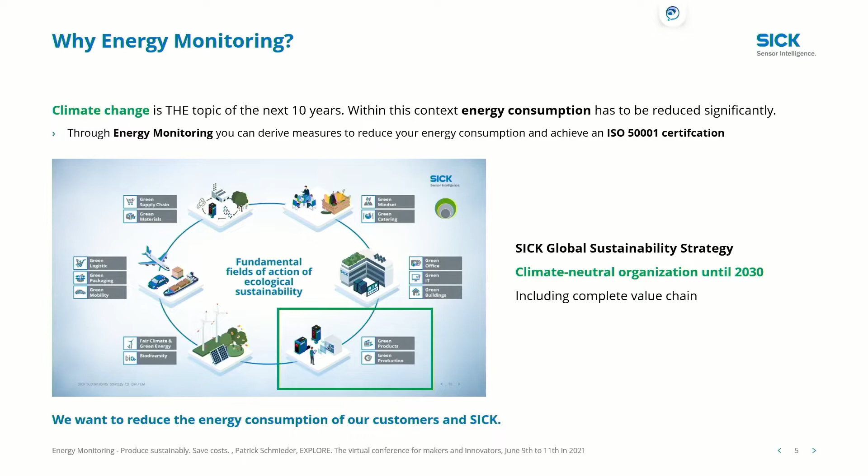So what are the benefits, let's say also in a short-term way, for energy monitoring? So often we see a very fast return on investment through these derived measures. And maybe you all know, at least our listeners from the European Union, that there are certain CO2 compensation fees, and these are significantly increasing fees from now on until 2030. For example, this year it is 25 euros, and I think in 2030 it's around 60 euros. So this is getting a more and more significant cost factor. So the cost, 60 euros, for example, is then per ton CO2.

So benefits of energy monitoring really depend on local conditions. So it depends what your government is doing to support this important topic. So I would like to ask you the question, how is it in your country? And there you can see how big the benefits are in your country. So if we look, for example, at Germany, the benefits often depend on the international standard ISO 50001, and therefore you need to have a continuous improvement, within this PDCA cycle as an example, in your energy consumption. So you really have to continuously reduce your energy consumption.

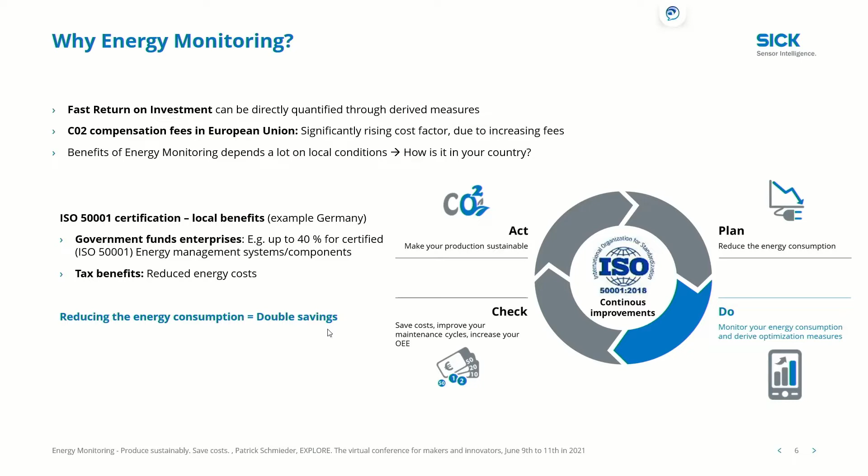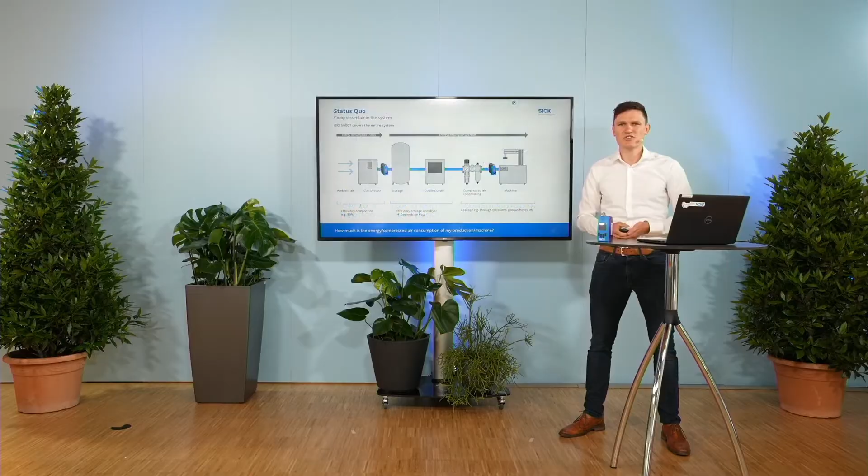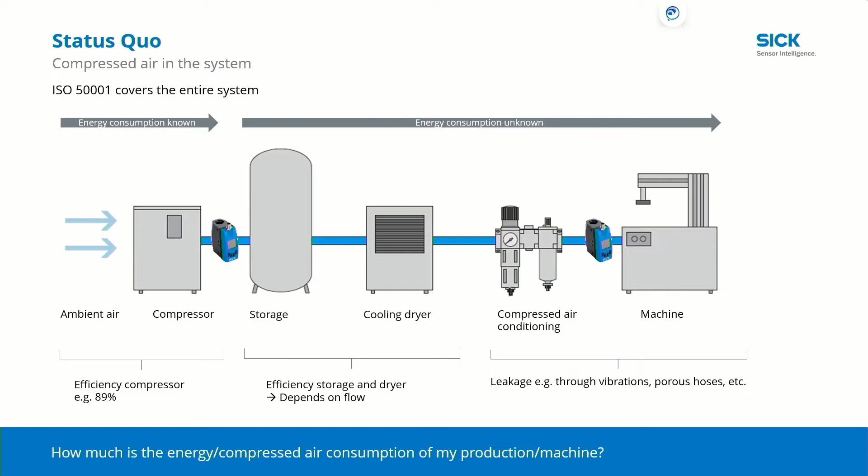There we are. Sorry for this short break, but now we come to the question of how to monitor the energy consumption on shop floor areas. And especially I want to go more in detail into the example of compressed air. So first of all, we have the current situation that we often know how much electrical energy our compressor needs to produce this compressed air. But what is happening behind? What is my passive consumption of compressed air behind the compressor, and what is in the end coming to my machine? So how much compressed air consumption does my production or my machine have? This is often still unknown.

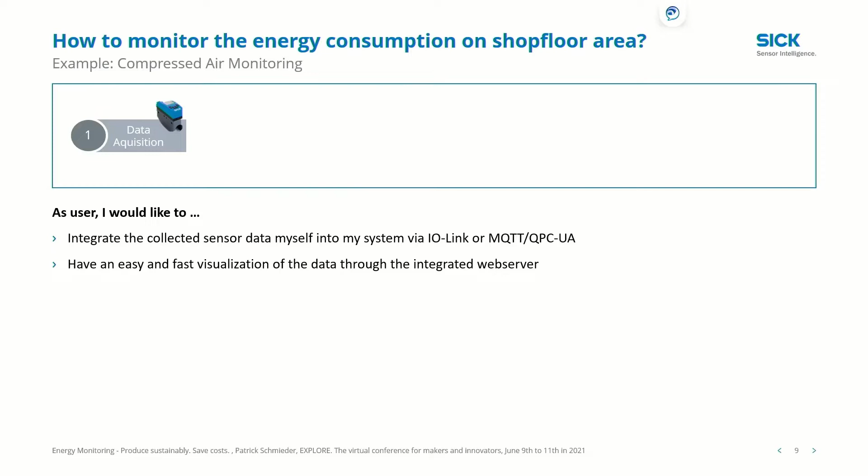So as first solution, as first use case, we have the topic of data acquisition. So this is the basis. This is called the FTMG. It's a sensor by SICK, which is specially designed for these energy monitoring applications. And as a user, it is important for me to integrate my collected sensor data myself as easily as possible into my system via IO-Link, via MQTT, or via OPC-UA directly into my overlaid system. And moreover, it is good to have an easy and fast visualization through an integrated web server.

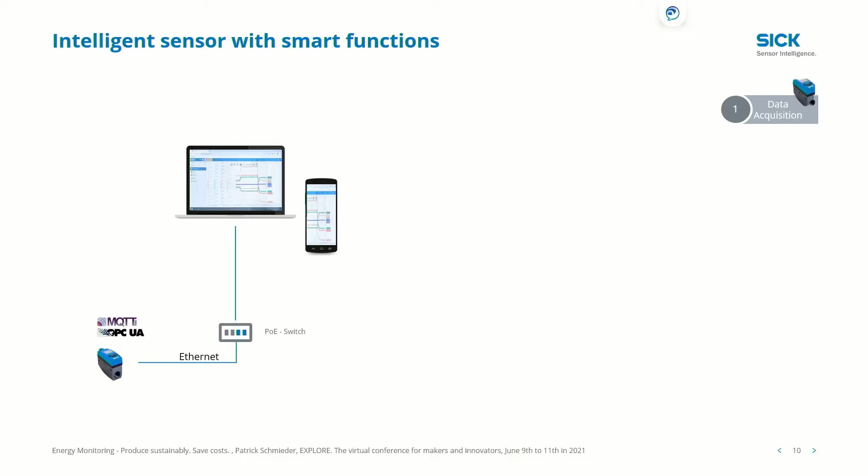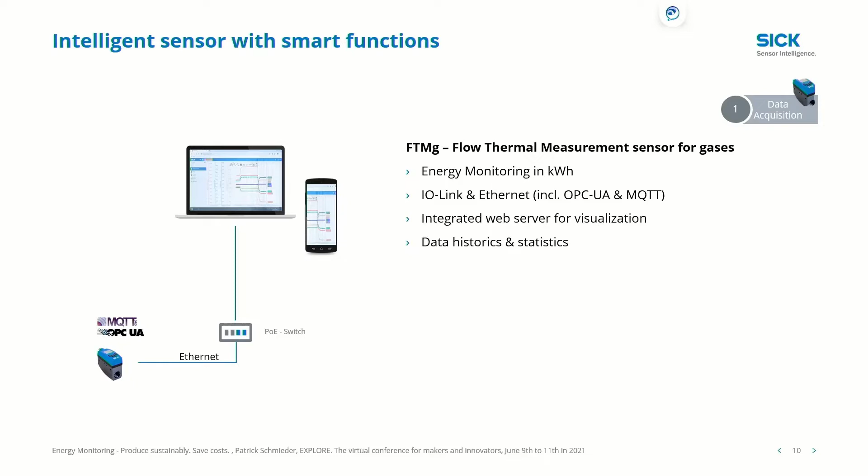So if we look, the sensor is connected via MQTT or OPC-UA directly into the user system, and can also be directly accessed for a first data visualization via my browser. So this flow thermal measurement sensor for gases can directly give you measurement data in kilowatt hours, so in energy, and the data historics and the statistics I just mentioned with up to 7 days are directly stored on board of this sensor and can be visualized on this web server.

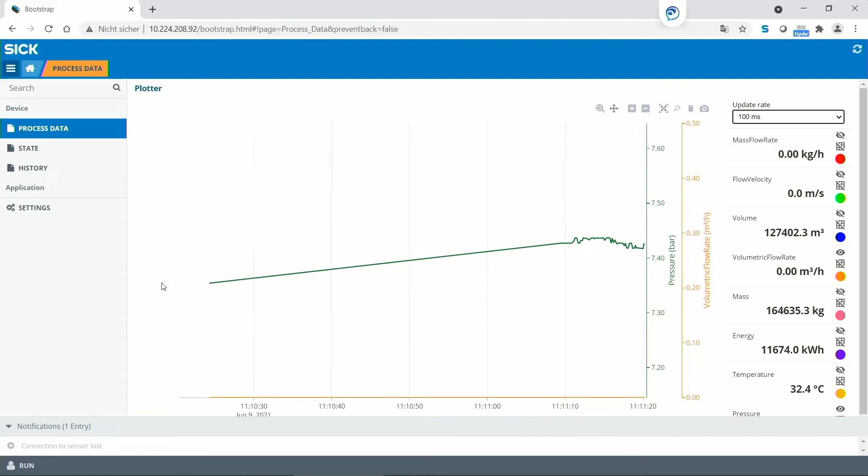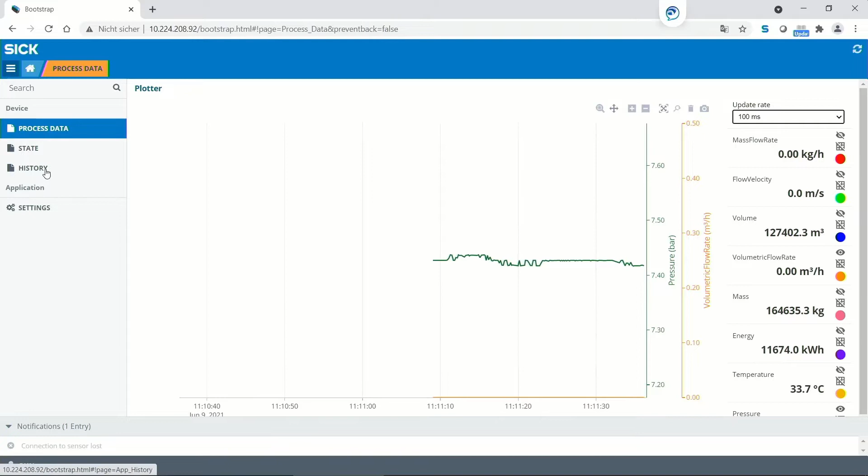So here I have a live example for you from our SICK production at a CNC machine. As I told you, it's an important topic for us. We also installed this sensor plenty of times in our own production. So here you can see that the live data is coming. You can see the pressure and the volumetric flow rate. As you can see, there's not a lot happening. So this means my machine is not running at the moment. It's a live demonstration, so it can happen that in this moment the machine is not running.

And what you can see here is the last 7 days. So for example, on June 5th, June 6th, up to June 7th, you see that my volumetric flow rate was 0, which is a good sign, as this was the weekend, and on the weekend the machine is obviously not running, and no volumetric flow rate means that I probably have no leakages in my pneumatic system. The pressure was quite stable, and on the blue or the purple line, I didn't consume any energy.

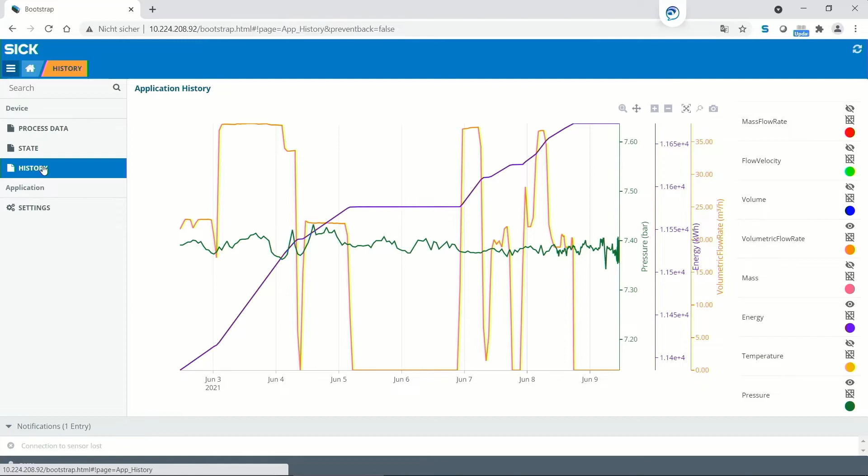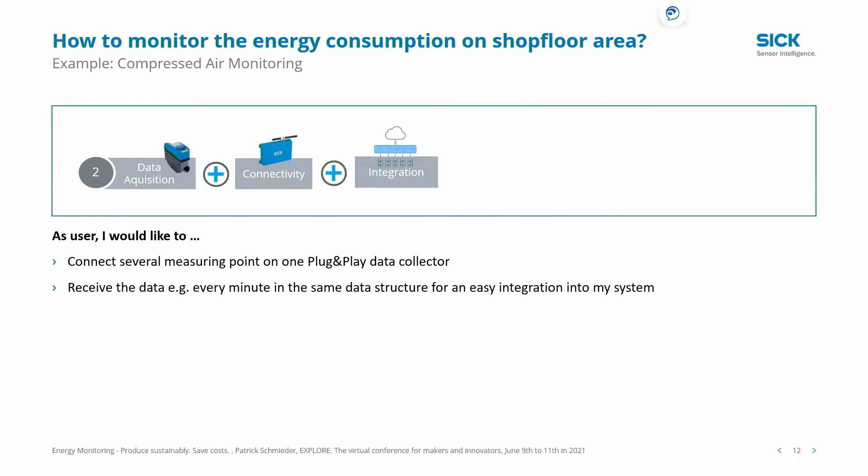So to go to the next use case, this is getting a little bit more complex, and this is also a use case where we have a dedicated department at SICK to solve these kinds of applications. So we have the topic of connectivity and also integration in this solution. For me as a user, it is important to connect all of my measuring points over one plug-and-play data collector, and I want to receive my data every minute or every 5 minutes in a certain data structure which fits into my system, so that I can easily integrate it into my whole production monitoring system, energy management system, or MES system.

So if we look at the topology, we have certain machines which are connected to an edge gateway, for example the TDCE by SICK, and this TDCE is responsible for the right communication into the user system. This TDCE has certain software modules on it for the integration into your user system, so that the data is coming in the right and stable quality into your system. What else is important for this solution is that we start with consulting first and with a proof of concept, as every user system is a little bit different. So we really have to look at how your production is set up, to design the right solution, so that we have efficient energy monitoring in the end.

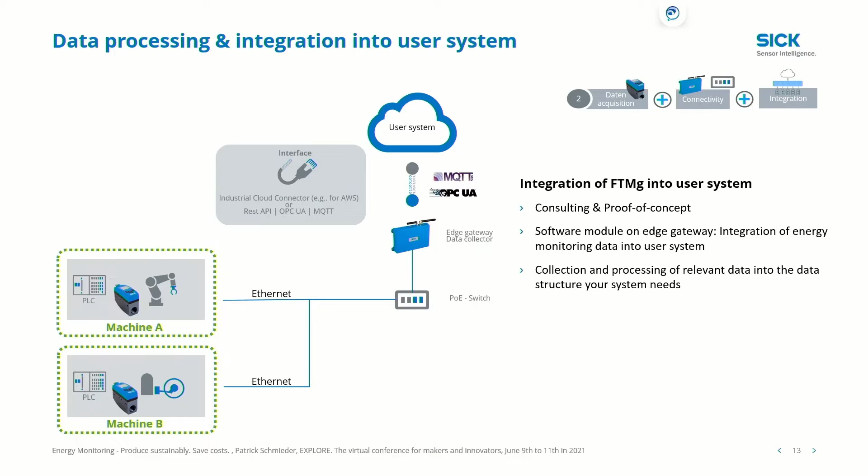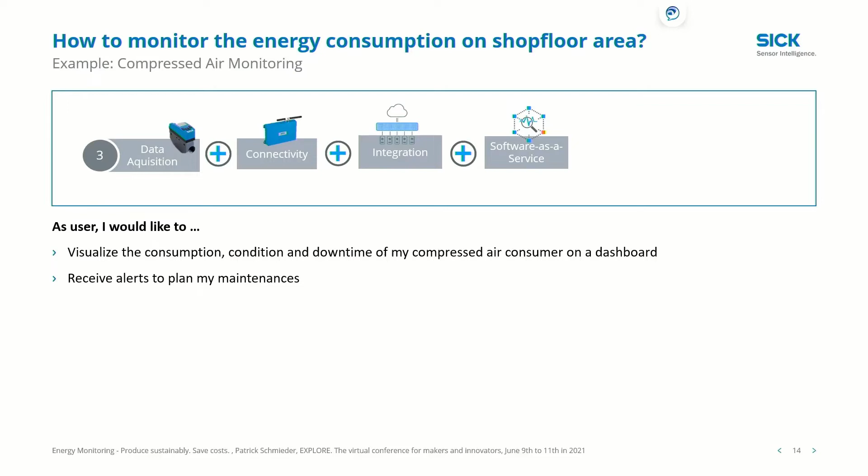And if we think this one further, as a solution, then we also add software as a service. As a user, this time it's important for me to have a turnkey solution to directly visualize the consumption, the condition, or downtimes of my compressed air consumers on a dashboard. And I would also like to receive alerts to better plan my maintenance and avoid extra costs. And here, beyond this gateway solution, I also have a firewall to the SICK cloud service, which you can access by your mobile devices or via desktop, or we can set up a cloud-to-cloud connection so that you can access it on your cloud. So as I said, a turnkey solution with no programming needed by you.

I have directly more transparency through this collection and visualization of live and historical data. I can identify cost drivers through anomaly detection, and also these mentioned configurable alarms. And as it is a modular setup, you can also extend it with more data you need, like machine data or external data sources.

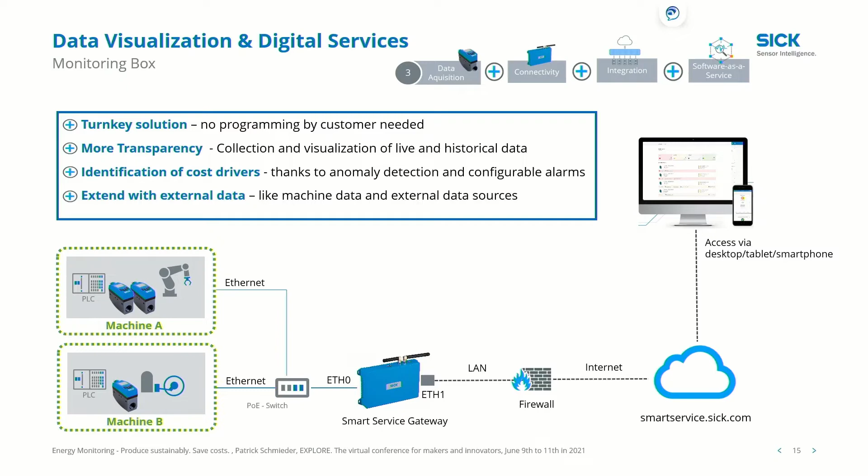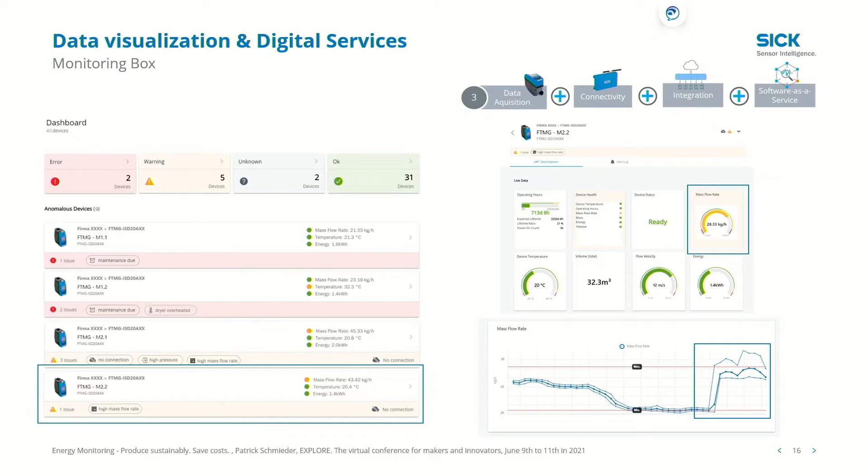So how does this look? I have the dashboard first with my different FTMGs, my different flow sensors. I see this sensor has a high mass flow rate, so I can look in detail at this sensor. I see the high mass flow rate, and then I can look at the data statistics. And what I see here is a significantly higher mass flow rate, a significantly higher consumption of compressed air than average. If I had the same production volume, that means something is not right. So during my next planned downtime of my machine, I can have a look if there are obvious leakages or anything else, or components which I can directly change.

So what can you do in the end to optimize your energy consumption? First of all, let's talk about the over 100%, so about the leakages and overconsumption. You can identify and eliminate them. But how do you do that?

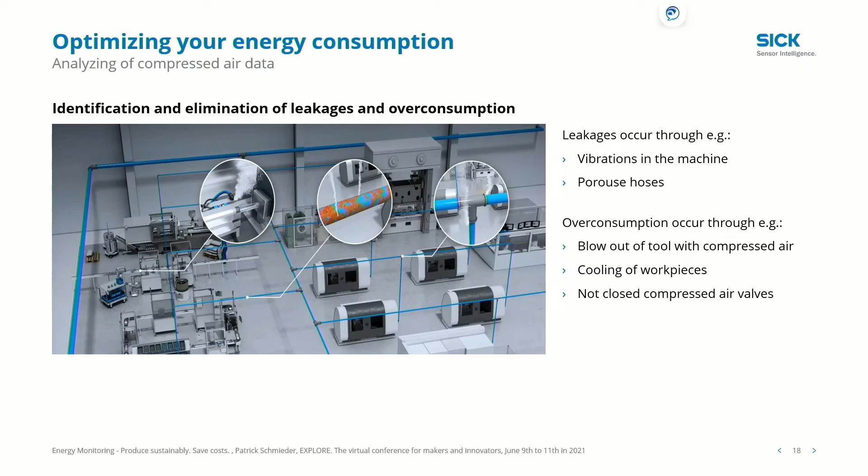Then in the third step I look, okay, what does that mean in terms of cost per year? To see how much I can save, to see if certain measures make sense. Then on point 4, I can monitor the compressed air as close to the consumer as possible to really identify the leaks and repair them in the end.

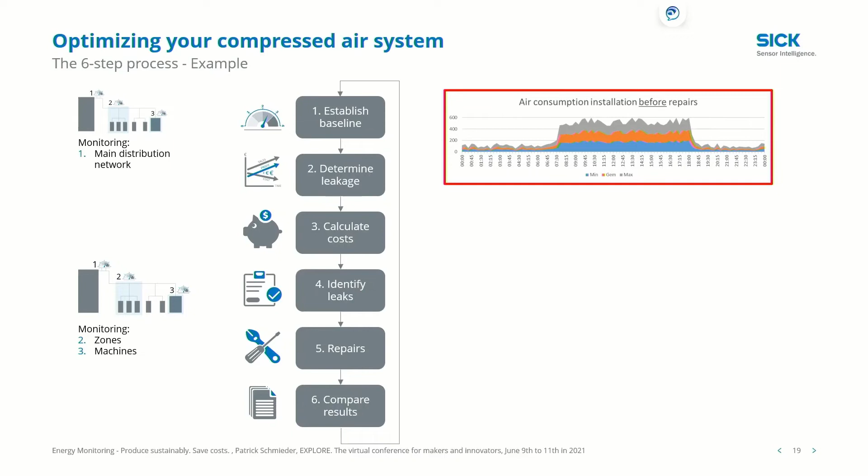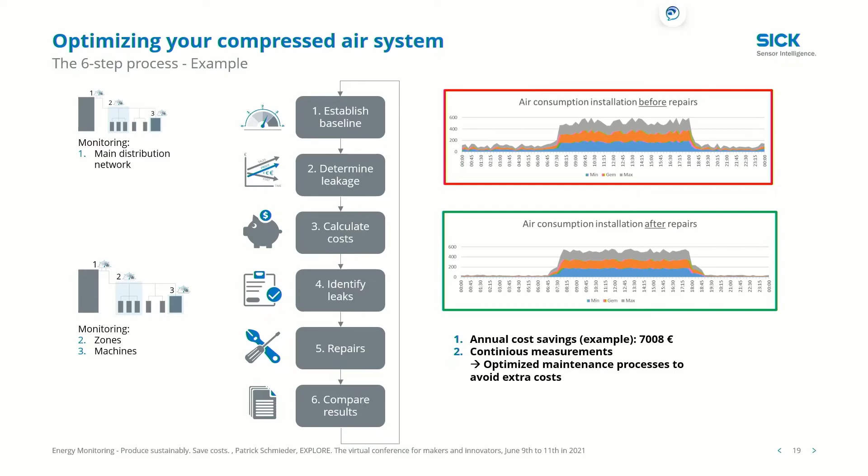And if I compare the results in the end, I reduced it to 10 cubic meters per hour in my production area, which means an annual cost saving of over 7,000 euros. And moreover, through these continuous measurements, I can optimize my maintenance processes with this data to avoid these costs in the future.

So, to reduce the energy consumption below the 100%, I can install a power on, power off management to identify times when you can shut down certain processes, certain machines, which are just not necessary. Then I have a compressor control. I can improve that to use my compressors in the most efficient way possible, depending on my production processes and how much compressed air I need.

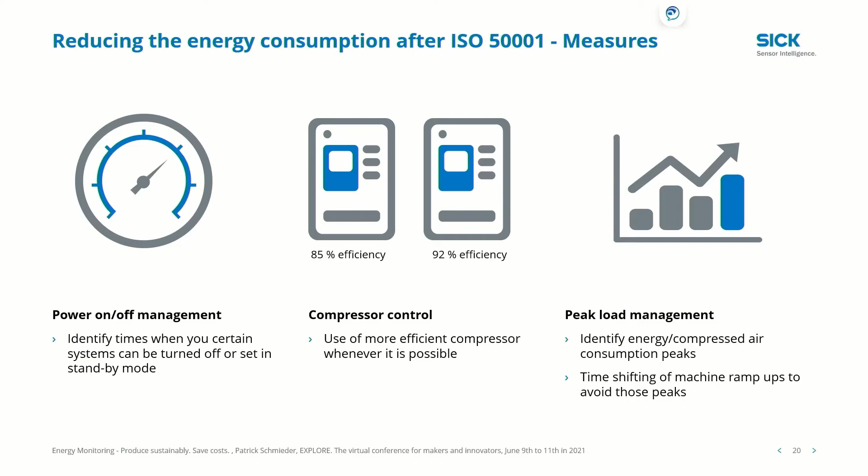And last but not least, a certain peak load management to lower these high peaks, so that I have a more stable energy consumption through maybe a time shifting of machine ramp-ups, for example, to have my whole infrastructure better adjusted to the energy consumption, which leads to a reduction in the end.

So, to come to my conclusion: produce sustainably. The leakages and the overconsumption, you can identify and eliminate them. Through continuous energy monitoring, you can derive measures to even reduce your energy consumption. And this data transparency helps to optimize your maintenance processes and to avoid downtimes, to make your machine processes more efficient. Save costs. As mentioned, I can avoid these extra costs of leakages, overconsumption, and unplanned maintenance.

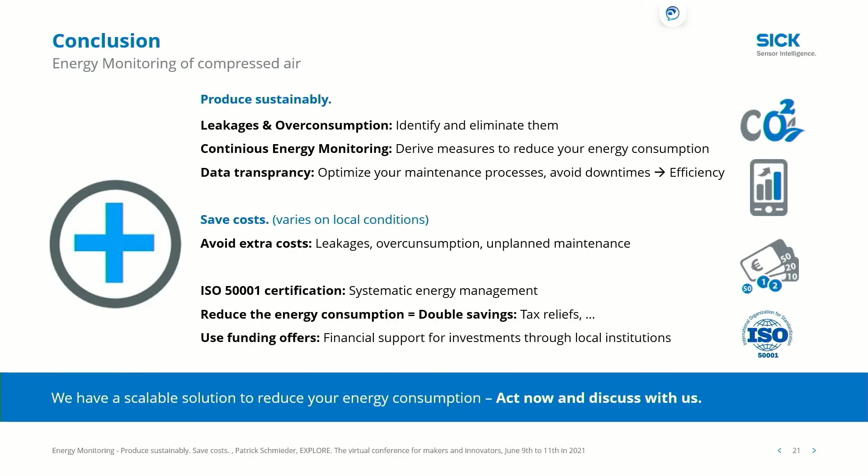And with the ISO 50001 certification, I can reduce my costs through reduced energy consumption. I have double savings, for example, through tax reliefs. And use the funding offers you have in your own country to have a cheaper investment into the future, into an energy reduction.

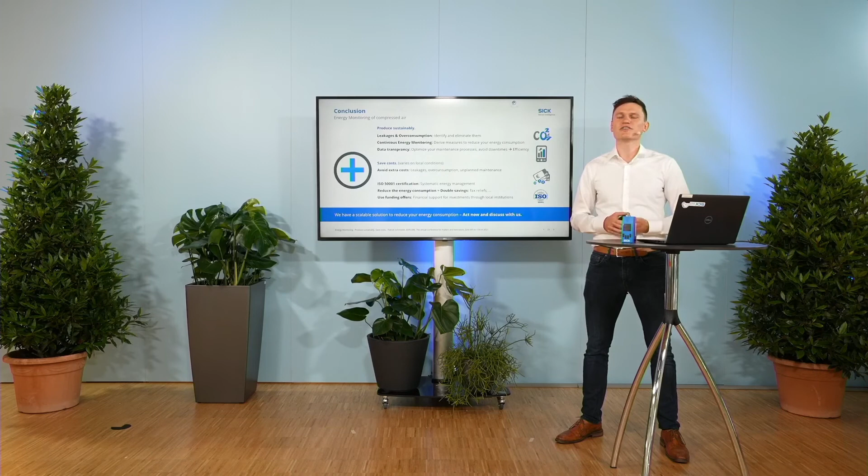Thanks, Patrick, for this great presentation and demonstration. Well, cost saving is of course important, but let's all save the birds and the bees. We like to go walking and cycling, especially the last 1.5 years. We have found the forests again, so let's not forget this topic.

I think you really touched the audience because we had quite a few questions. We don't have too much time, but here is one: is it possible to embed your solution in your own ecosystem and just use data points to get all the information? Yeah, so this was solution number 2, where we have this data acquisition and integration, and this is quite a flexible solution. There we're looking at your system, at your needs.

Maybe you're using a different sensor for electrical energy. So it's possible to deliver this integration service as well. This is really looking at your needs, at your system, with the goal to integrate a certain energy monitoring solution into your ecosystem. So to summarize, we can either provide a full solution or we can provide tools to get it implemented in your existing application or system.